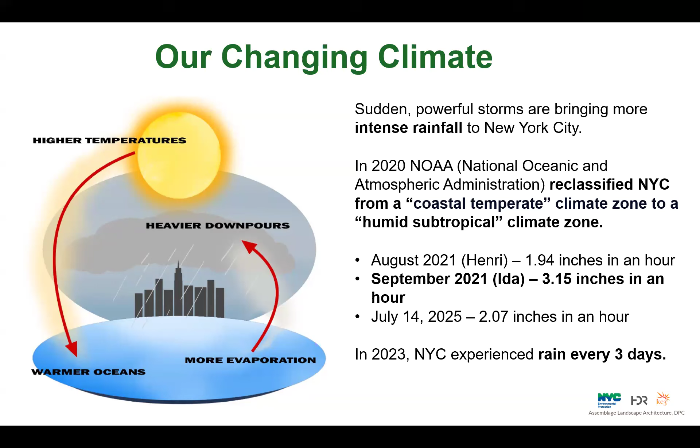So on the next slide, really getting into what is cloudburst? So we define this as a sudden and heavy downpour where a lot of rain falls in a short amount of time. So like the storms I just mentioned before, these are high intensity events that can also be very short in duration, but overwhelm the sewer's capacity. Next slide.

And when we talk about flooding in the city, this can mean many things, from coastal flooding, which many are familiar with from Hurricane Sandy, to groundwater flooding and system surcharging. But we really want to highlight that the Cloudburst program focuses specifically on overland flooding, which you can see highlighted in the upper left, because this program uses a particular toolkit, which I'll describe more in a moment, but it's really designed for this particular type of flooding and can be less applicable to some other types, depending on the scenario.

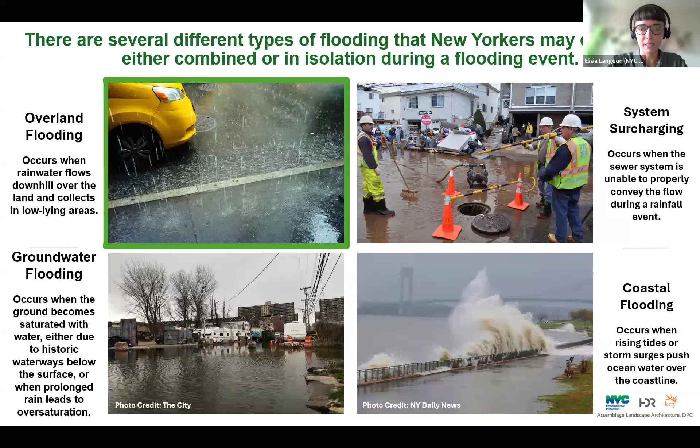On the next slide, we'll see the different types of flooding from that list that are showing up in the East New York hub. So these are overland flooding, system surcharging, and pooling at roadways. We'll get much more into this with the consultant team later on.

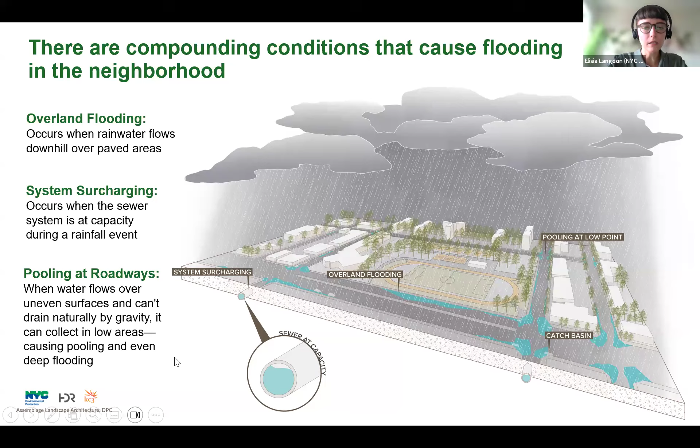But on the next slide, Cloudburst infrastructure that we're using is meant to address these issues based on three main pillars, and these are absorb, store, and transfer. So we implement a combination of gray and green infrastructure that perform these functions and are designed to manage up to 2.3 inches of rain per hour.

Next slide. This gray and green toolbox is a collection of strategies that have been successfully implemented throughout the city already. So these include, but are not limited to, porous pavement, rain gardens and bioswales, and subsurface water detention. You may already be familiar with some of these in your neighborhood or other parts of the city, particularly the rain gardens many people have seen in the right of way.

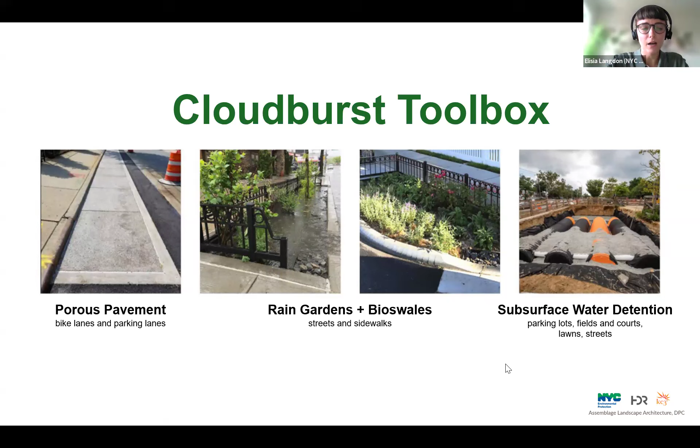And the next slide, we'll look at the Cloudburst hub network. So what really distinguishes the Cloudburst hubs from these distributed projects that you may have already seen is that we're targeting a particular modeled flooding hotspot and putting all these tools together into a network at the neighborhood scale. So as you'll see when we get into the specifics for this hub, the hub boundary doesn't follow the neighborhood or community board district line, but is rather determined by the geographic area that's contributing stormwater flows to these target flooding hotspots. And within this boundary, we're siting as many interventions from our toolkit as we can to work together to reduce that hotspot. Next slide.

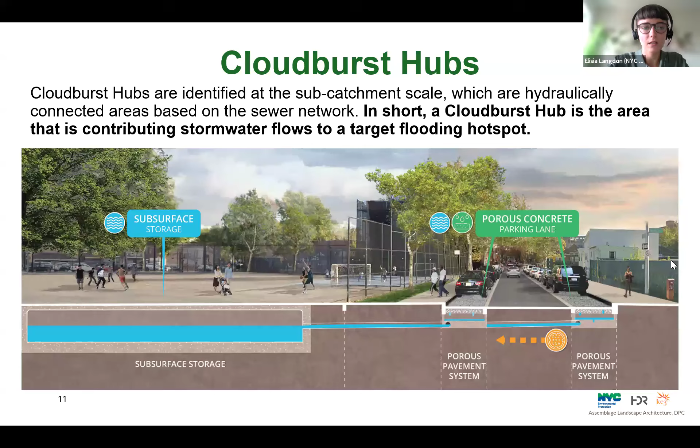And to close out my portion of the presentation, just zooming back out to the citywide scale, the East New York hub is one of 5 initial hubs that are currently in design. Other hubs include Parkchester Morris Park in the Bronx, Kissena and Corona, which are 2 distinct hubs in Queens, and Brownsville, which is also in Brooklyn. So with that, I think I'll pass to Ray.

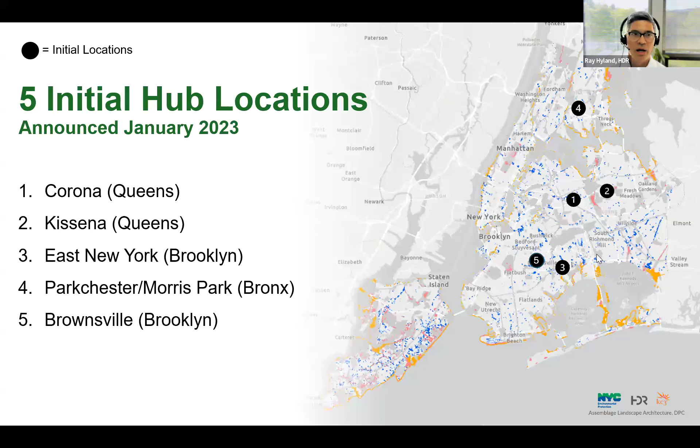Thank you, Elisia. Hi, everyone. I'm Ray Hyland. I'm the project manager with HDR and the team, and I've been leading the design for this hub, and we'll be getting into some of the details of our stormwater management practices. Next slide.

So we started by asking a few key questions. Where is the flooding happening most frequently and severely? Why is it happening? And how much water actually moves through this area? So taking a closer look at this 370-acre focus area, it wasn't chosen at random. As Elisia mentioned, we really selected this area based on a combination of factors, and that was through stormwater modeling, which projected the flooded areas.

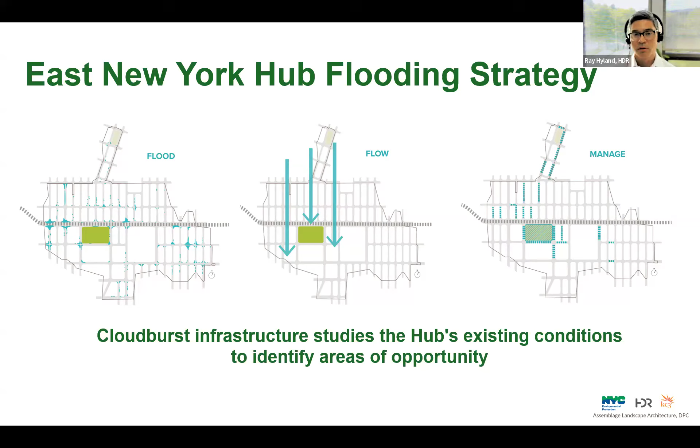We reviewed local drainage and topography that showed how the water concentrates in the area. We also aligned with ongoing planned capital improvements, which allowed us to leverage the work that was already in motion. And there was a strong case for equity. This area has a high level of vulnerability to flooding, so near-term improvements can make a real difference. Next slide.

So speaking on the flooding, we didn't rely on one data point to identify these problems. You can see the results shown here in blue. That's the flooding areas that we identified. This hub was selected based on a mix of inputs, from 311 complaints to community feedback, and also the advanced stormwater and sewer modeling that we did. So that identified these deep flooding areas, not just puddles, but areas where cars have to swerve around or pedestrians have to avoid and they step into traffic to avoid it.

So real nuisance areas. And that's why we're targeting these places where we could manage the water in place, closer to where it falls. And the more we do that, the less pressure we put on the downstream drainage system, and the better we can actually reduce combined sewer overflows, which improve water quality in Jamaica Bay. Next slide.

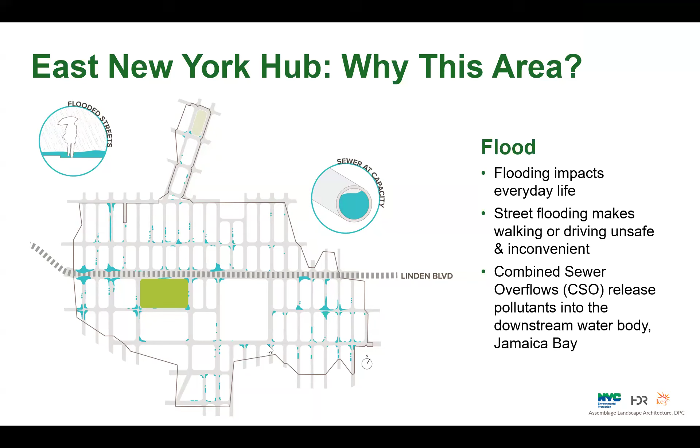And so speaking about where this water flows, it generally goes from north to south toward Jamaica Bay. But south of Wortman Avenue, there was once a tidal marsh, and history kind of still shapes how water behaves. So even without visible streams, you can see low-lying pockets remain, and slight changes in elevation shift where the water accumulates.

So using that knowledge to really intercept where water overwhelms the low points or the sewer system. And we're going to do that through a layered system, which includes the green-gray approach that Alicia mentioned before. And that's porous pavement near the curb and Linden Park and a network of catch basins to capture the runoff and hold it during major storm events. So I'll go into that next slide.

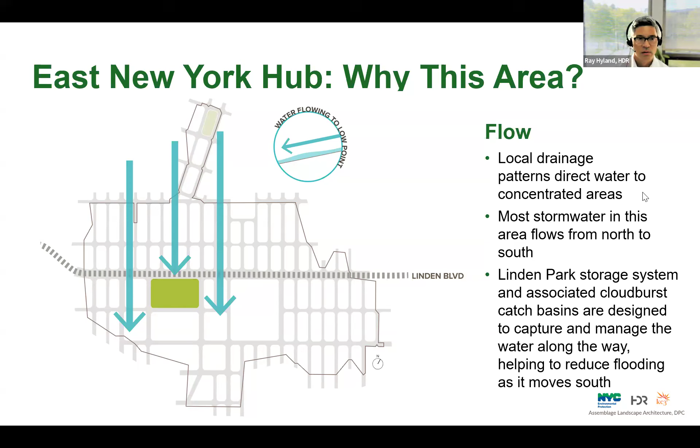So with that in context, we can start designing how we manage the stormwater. And this area offers a unique mix of parks, triangles, and wide streets that give us real options. In the open spaces, we can store the water underground. And in the street, we can capture water at the curb before it flows further downhill and into the catch basin and sewer system. So we're applying this layered green-gray approach to slow the water down, store it temporarily, and then send it into the system when it can handle it. Next slide.

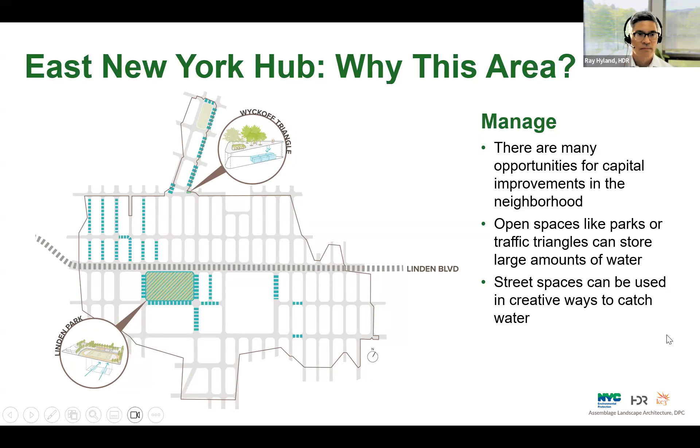And how we do that, I mentioned this before, but this is where I want to talk about these precast porous concrete panels. They're installed at the curb lane. They're 2 to 4 feet wide. And each panel catches water where it lands, right at the gutter, and allows it to filter through into a stone bed below. It may look like solid pavement, but they're porous by design. Water collects below the surface and it's slowly released into the system. And just as a note, they are strong enough to park on, and even the heaviest truck can park on it. Next slide.

So these panels are one of our most practical tools. You can see the detail here. This really shows how it's integrated into the street. It replaces traditional pavement with a surface that looks familiar, but actually performs better. So it allows runoff to soak in. You can see there's a drainage cell that allows some of that water to slowly be conveyed, and also a stone bed that allows it to infiltrate through the soils

when it's allowed. So we're not interfering with parking. It's something we've heard was essential for residents. So the solution is modular, it's scalable, it blends right into the streetscape, and gives us stormwater capture without disrupting everyday use. Next slide.

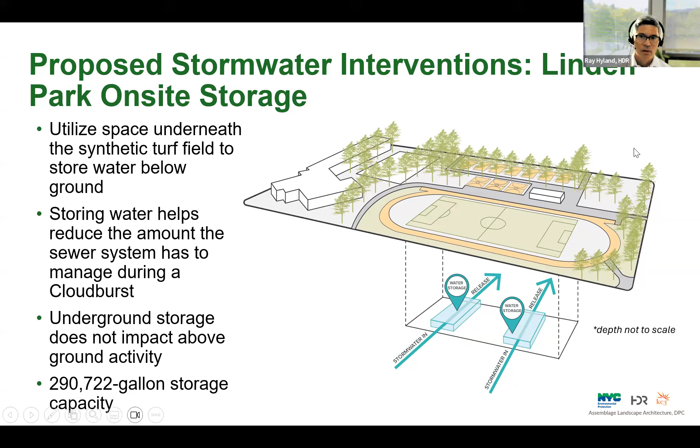The field and the track will be temporarily removed in the park, but it'll be fully restored with upgraded amenities once construction is done, including additional surface improvements in the park, which will be covered later in the presentation. Next slide.

The other on-site place we're looking at is adding a smaller but really strategic underground tank near Riverdale Avenue. This is at Wyckoff Triangle, and it's connected to a new catch basin and will capture 30,000 gallons of runoff from the street. Again, similarly, holding it temporarily, slowly releasing it after the storm, and helping relieve pressure during peak rain events. And I want to mention that both systems, if they fill up, are still connected to the existing system so overflows can be safely managed.

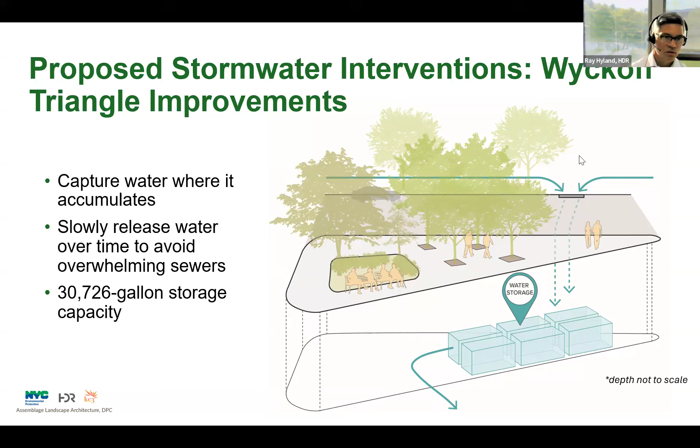And again, this spot also includes some surface improvements, which we'll cover in the next slides. But that's it for my portion, so I'll turn it over to Emily to discuss the community outreach events.

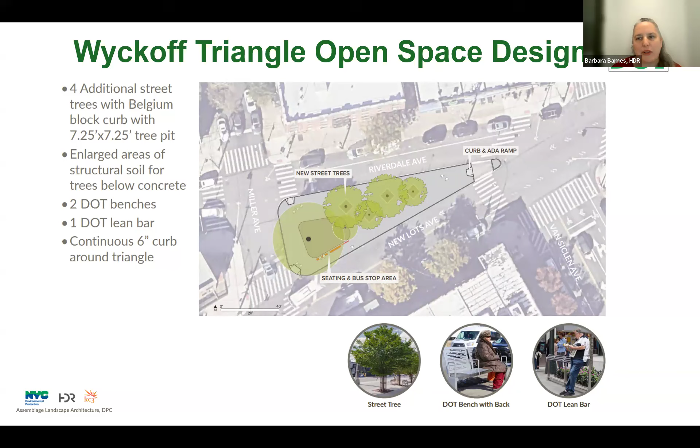Then additionally, we can turn to the rendering. That'll give you a better view of what this actually looks like in person. Perfect, thank you. So you can see we kind of clean up the area a little bit, and the existing trees remain. Those are the 2 you see in the foreground behind the benches. That existing planting bed stays the same. And in the background, you'll see the new street trees that are getting added in, so those 4 new trees.

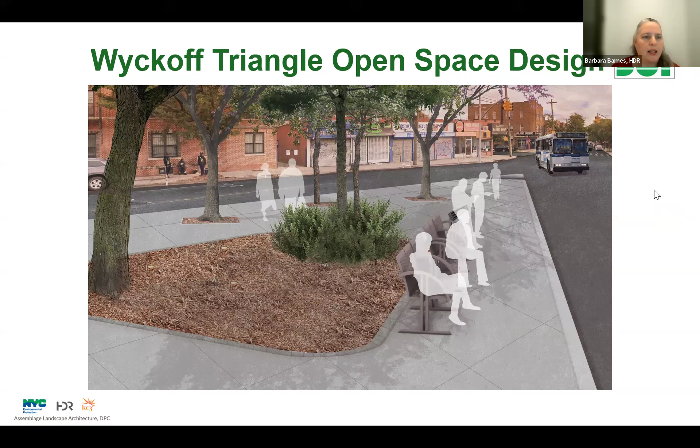We did hear conversations about plantings, but we also heard conversations about cleanliness and rats. So for that reason, we veered towards putting the new trees in tree pits, less space for the rats to populate. That was the choice that we made to go that direction. It also opened it up for a lot of better views across the triangle and more access for the ways that people traverse the triangle. So it also freed up open space for you. And as we did see people pooling and congregating against the tree pit, that gives you a lot more open space to wait for the bus and congregate and talk and chat. So that's Wyckoff, and then we're going to move over to Linden Park.

Perfect. So as Ray mentioned, most of the activity in terms of stormwater and water management, you guys will never see. It all happens below ground. So most of the work of this site is actually below the synthetic turf and the track. All of that will get replaced just like you see it today. So you'll have a whole new synthetic turf, all new track, a new long jump, just like you're familiar with now. And then in addition to that, we added a few amenities just to liven up the space where we could and take advantage of being in this area. The next slide starts to go through some of those extra amenities.

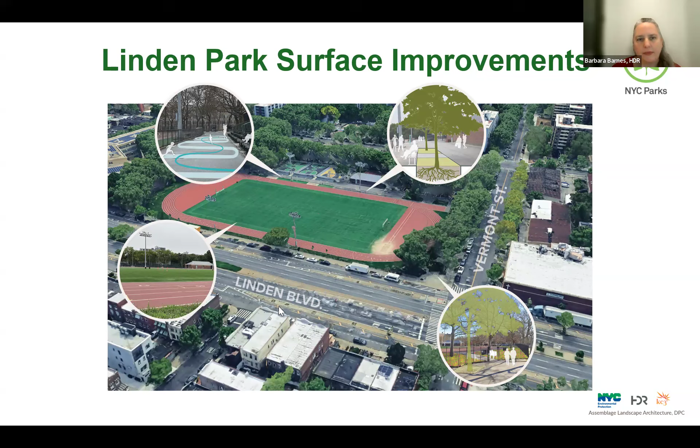For some reason, it's not changed. There we go. It was delayed for me.

Alrighty. So the first is we love trees, so we tried to put in a couple of new trees. There are a lot of utilities in this corridor. If you've been to the park, which I know most of you have, it's that corridor that leads you from the center of the park towards the bleachers. There's a lot of utilities in this area, but we are able to put in 2 new benches and 2 new trees. So at least you have an opportunity to sit in the shade while you're watching activities on the field. And because of sight lines and other issues, there wasn't a lot of opportunity to add more to this corridor, but we did where we could.

So that'll help provide shade, cover, and also trees have a lot of great benefits for stormwater too. They really act as umbrellas in absorbing that water. So all great benefits to add into it.

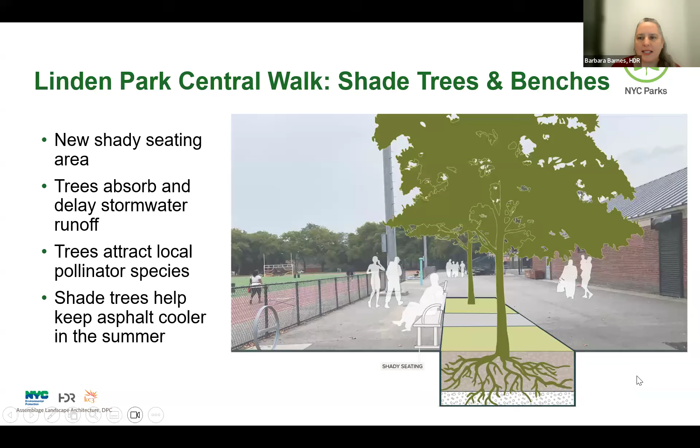And then the next slide shows the corner of Linden Boulevard and Vermont. So that entrance on the corner, that's going to get a little bit of a freshening up. It is missing a street tree. If you've ever entered from that side of the park, you can tell where one's missing. So add that tree back in to kind of remake a new statement and add that kind of balance back into the site. And then new plantings right beyond the fence to dress it up.

They're going to be more low growing, so you won't have sightline issues, as well as aromatics. They're going to have a great smell. That catmint has a wonderful smell. So it's aromatic for us, but it also helps to keep rats out. They don't like the smell and the texture as much. So really thinking about us using it as people, but also what other species might also be using the spot. And then there's also benches that are added to that corner as well. So new seating gets added to that planting area.

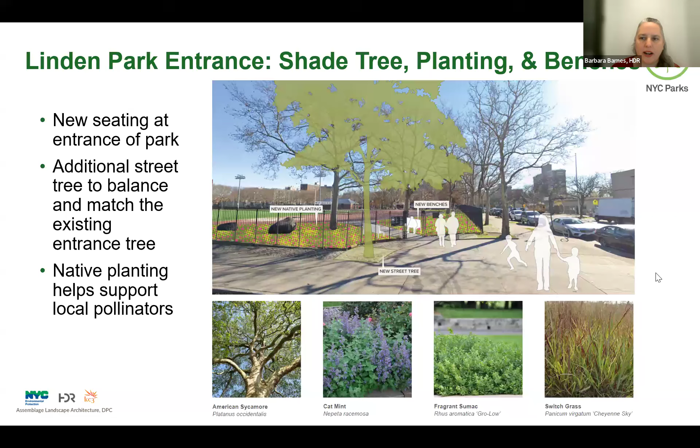And then the next slide shows the final area that we're working in. It's right by the bleachers. So again, that kind of hallway that's through the park that runs right down the middle. We couldn't put in trees or any other greenery because we didn't want to block sight lines to the actual field. But we were able to put in a painted game. So that color seal asphalt, it provides both kind of whimsy and a little bit of free play.

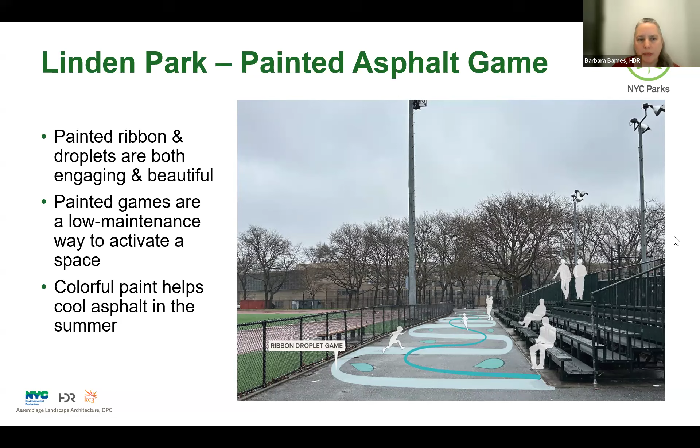But most importantly, when you do painted asphalt, it can actually cool the asphalt surface down. So it's not as blazing hot because you're not getting as much reflection back. So that was the area that we're going to do a little bit of color seal, have a little bit of fun, and hopefully cool that surface down as well. And I think that wraps up everything in terms of Linden Park. And Emily, I'll pass back to you. You do signage and talk about wrapping things up.

Great, thanks, Barbara. Yeah, so as Barbara mentioned, across all hubs, DEP is creating graphics and messaging to help share information about neighborhood infrastructure and some of these upcoming improvements. So before we get into general questions about the hub and this project overall, we did want to take some time to get some live input from all of you on some possible signage concepts. So we haven't yet gathered any specific feedback on signage just yet for the East New York Cloudburst Hub. So your thoughts today will be very valuable in shaping what you think is most useful for the community.

So some of the themes for signs could highlight how local water bodies historically flowed through the neighborhood, how the stormwater management infrastructure works, or even local stories and lived experiences from community members, as well as celebrations of neighborhood history and local heroes. So these are just a few starting ideas, but we would love to hear from you. So we can go ahead, Danny, and launch the poll just to see which concepts resonate most with folks. So we do have 2 questions, with the first one asking which signage themes are you most interested in, and then the second one asking if folks have any other ideas or messages that you'd like to see included on the signage. So we'll go ahead and take a couple minutes for folks to, great, thank you.

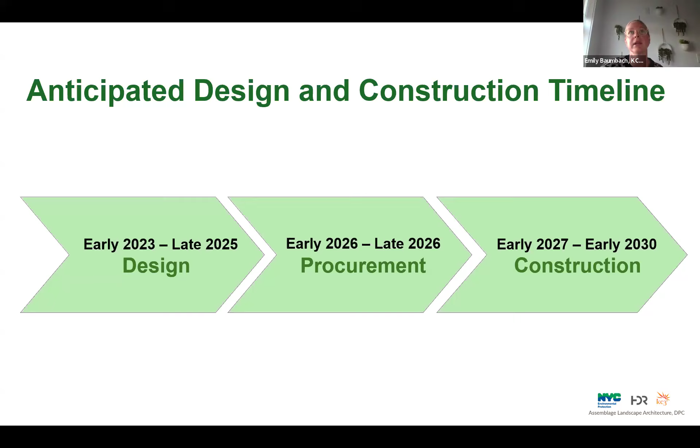All right, so just moving along to next steps for this project. So looking ahead, the anticipated design and construction timeline for these Cloudburst projects is for the design to run through late 2025. DEP will then procure construction contracts through 2026 with the goal of starting construction by early 2027 with an estimated completion of early 2030.

And as a reminder, after this presentation today wraps up, there will be another update presentation in early 2026 to share progress on the planning process for the upgrades to the East New York hub. And so that concludes our presentation portion for today's webinar.

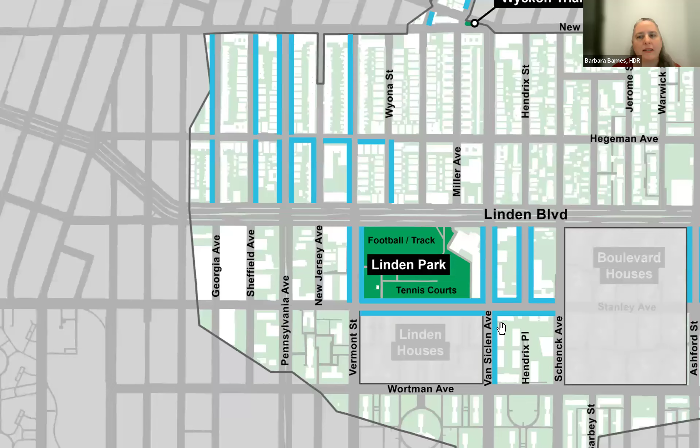I have a question about the tank. So it's only able to manage runoff from those 4 blocks of Linden and no more? That's for the tanks themselves, that's correct. It's based on the topography of Linden Boulevard itself and how we can actually site the catchment.

Yeah, just to expand on that, there are a lot of constraints. We're pulling as much water as we can from the surrounding area to capture. And then the supplement is the precast panels, but it really depends on the gravity flow that we can get into the park itself. And we're a little bit constrained on the depth because the groundwater is high there. So there are some constraints that limit us on the amount of water we can bring in, but basically, we maximized our ability to capture and store and slowly release at that location.

But what you're able to capture is significant enough that you feel this is worthwhile. Yes, certainly, we're managing a large storm event, a cloudburst event. So from just a design standpoint, almost 300,000 gallons is a significant volume that we can store within that area. Okay, that's great. Yeah, and I'm glad to see the porous pavement is much more widespread.

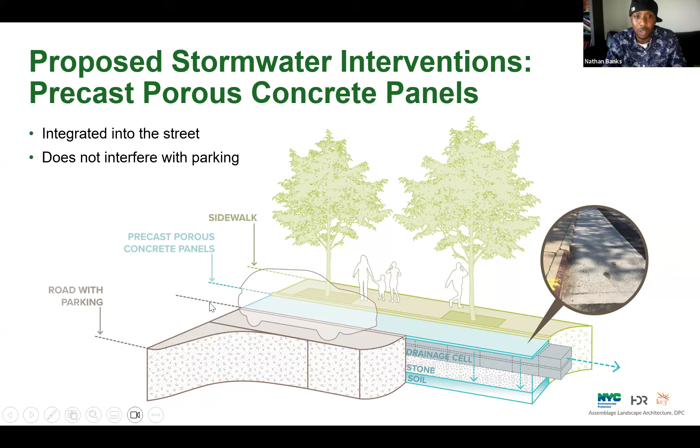Yeah, hey, so my name's Nathan Banks. I'm a park supervisor. I'm not representing the agency by any chance. I just happen to be a local community member. I've lived in the neighborhood for a long time. And I was the one who asked about the garbage cans because over the years of just being in that intersection where those three streets meet, and knowing that the buses was like a hub for the 3 train, the 83 bus, and the 15 bus, I asked about the garbage cans because I know the amount of traffic that comes through that area.

And previously, we've had a lot of dumping issues in the past in that area. So I guess strategically, I would hope that the agency would put some form of cans there, as I'm looking at the new model with all of the pavement area that you guys got, and the additional benches for seating. So that's something that is in the conversation.

And also, just by question, artists in the neighborhood, the creative elements that you're bringing. How can the local artists in the neighborhood maybe contribute, or how would they be able to give input as to what can be artistically done to be more eye pleasing to the site? And would you be interested in using local artists from the neighborhood who are interested in working or donating their time?

I can talk about trash. I don't know, Alicia, if you can talk about public art. Okay. So the trash, we can bring back up with parks again. There's always concerns about trash and who picks it up. We can certainly bring it back up to them again. We can also bring it up with sanitation if they can put a trash can somewhere else that's close by. Because most people are walking, so hopefully it's close enough people put it in the can. So good point. We'll bring it back up to them. Unfortunately, it's not up to me. But I don't know if you can talk about the art piece.

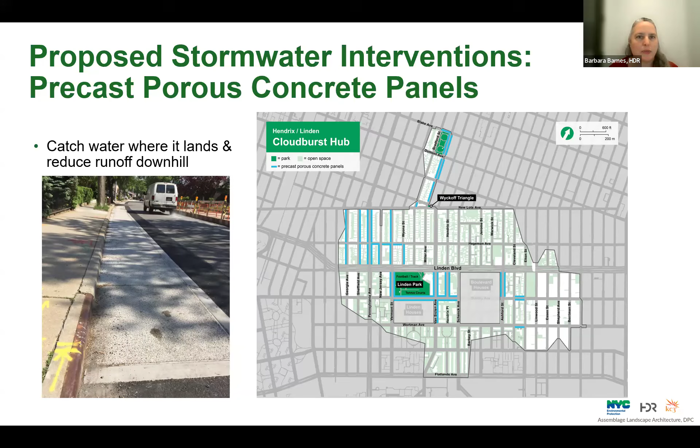So while we're under construction, if you can imagine Linden Park, it has kind of like that hallway down the middle of the park, dividing the track from the other half of the site. It's really that hallway, if you will, and the field that got impacted. So the playground will stay open. Anything south of that, the restroom, would not be impacted, if that makes sense. So you will have access to some of the park continuously. So thank you for pointing that out, because I should have made mention of that. It's not the whole park that is closed down.

Yeah. See, you should be hired, Deborah. You're killing it over there. You're asking all the good questions.

Josanna knows I have another big project I'm working on, which isn't too far from you guys. That's why I questioned Linden Boulevard. I'm part of the Jewel Streets project. Oh, okay, very nice. We have another meeting on Thursday.

Deborah's like my coworker at this point, so we're on top of it. Non-paying coworker. That's true. I got all the good questions, so I appreciate it.